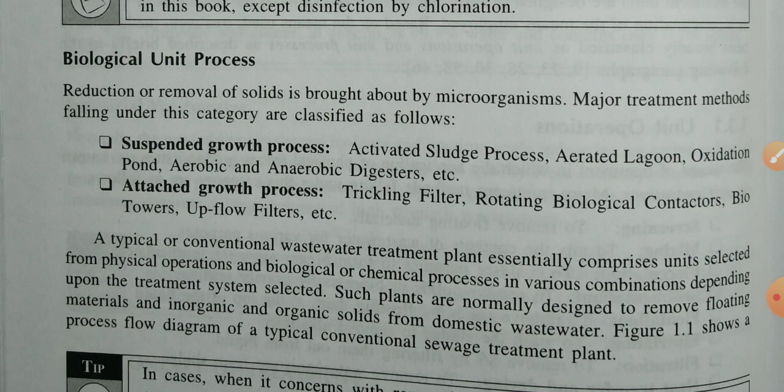This is simply the operation of physical, biological, and chemical processes in various combinations depending upon the treatment system selected. Such plants are normally designed to remove floating materials and inorganic and organic solids from domestic wastewater. Figure 1.1 shows a typical flow diagram of a conventional sewage treatment plant.

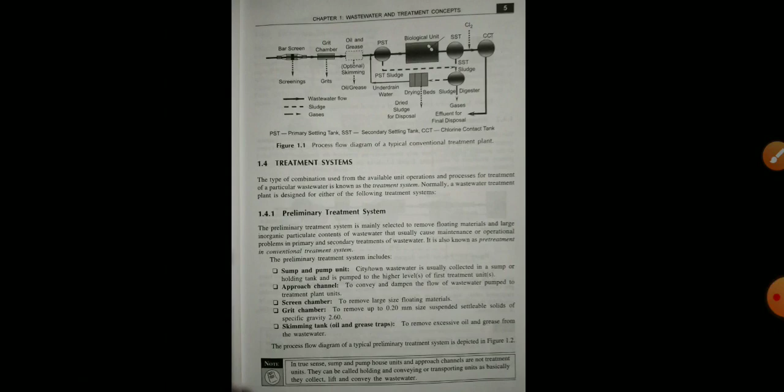Now this is the plant we will mostly see in figure 1.1: this is the primary settling tank, secondary settling tank, and chlorine contact tank.

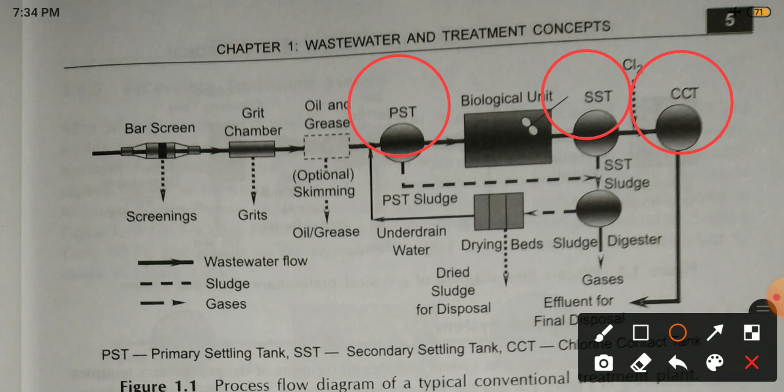Okay, first of all, this is the PST primary settling tank, second one SST - this one secondary settling tank, third one is this one, chlorine contact tank. Okay, so one by one we discuss these processes.

Process flow diagram of a typical conventional treatment plant.

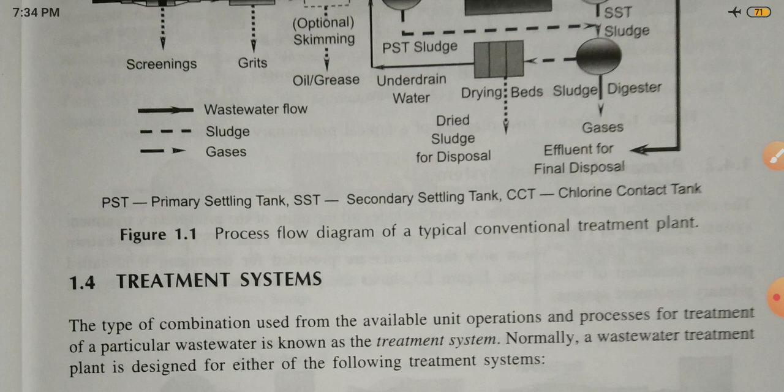This is a process flow diagram of a typically conventional treatment plant, which we have seen is a biological unit process. A typical or conventional wastewater treatment plant essentially comprises units selected from physical operations, biological operations and chemical operations in various combinations depending upon requirements. Note down these two points.

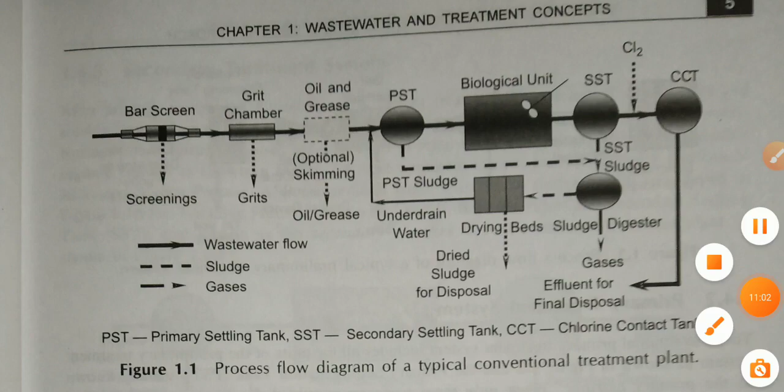Now we will see the revision part. This is the chemical unit processes. The reduction or removal of contaminations is brought about by means of chemical reactions by adding chemicals. The major treatment methods falling under this category are as follows.

The chemical precipitation part is to enhance the removal of suspended solids, phosphorus, heavy metals and biological oxygen demand in specific system conditions. For chemical oxidation, to remove grease, ammonia, biological oxygen demand, chemical oxygen demand, and for odor control in particular requirements.

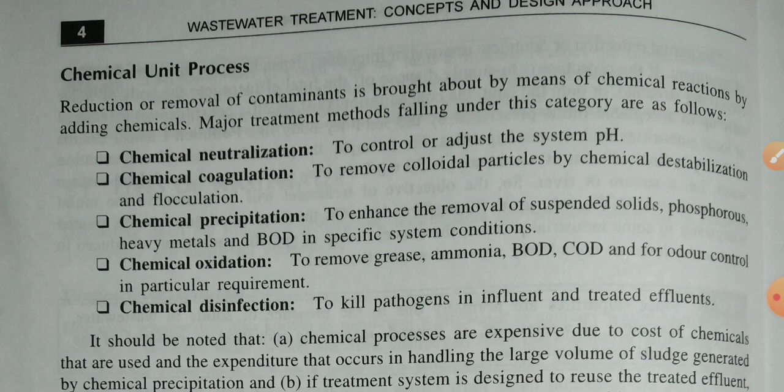The chemical disinfection is to kill pathogens in influent and treated effluents. It should be noted that chemical processes are expensive due to the cost of chemicals used and the expenditure that occurs in handling the large volume of sludge generated.

By chemical precipitation, and in part B, if a treatment system is designed to reuse the treated effluent and increases the concentration of specific constituents, it requires some consideration. Note that chemical processes are normally not provided in conventional treatment of domestic wastewater. Design examples of chemical processes are not covered.

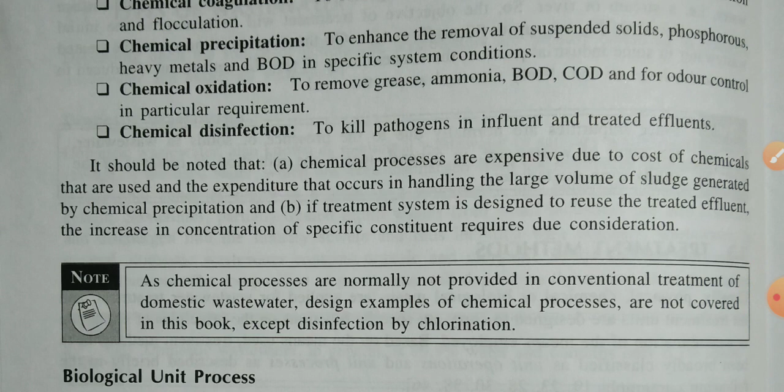Except this is disinfection by chlorination. The biological unit processes for reduction or removal of solids is brought about by microorganisms. Major treatment methods falling under this category are classified as: suspended growth processes, activated sludge processes, aerated lagoons, oxidation ponds, aerobic and anaerobic digesters, etc.